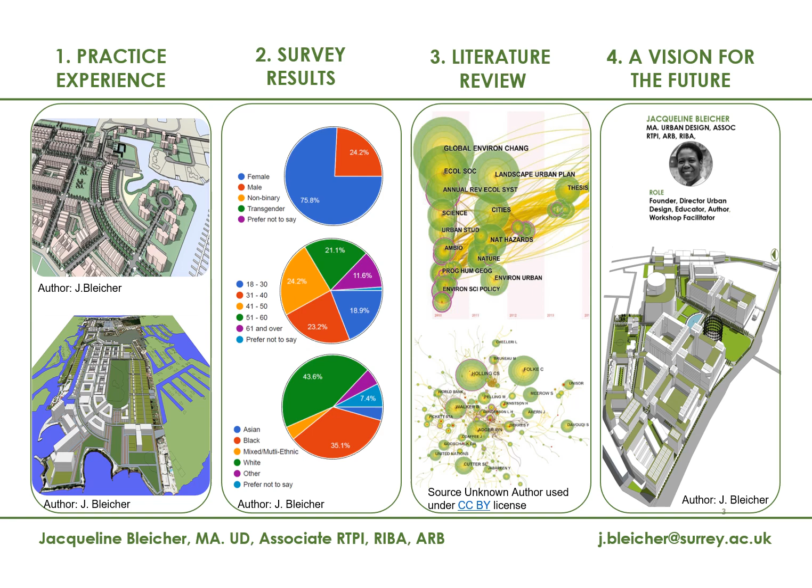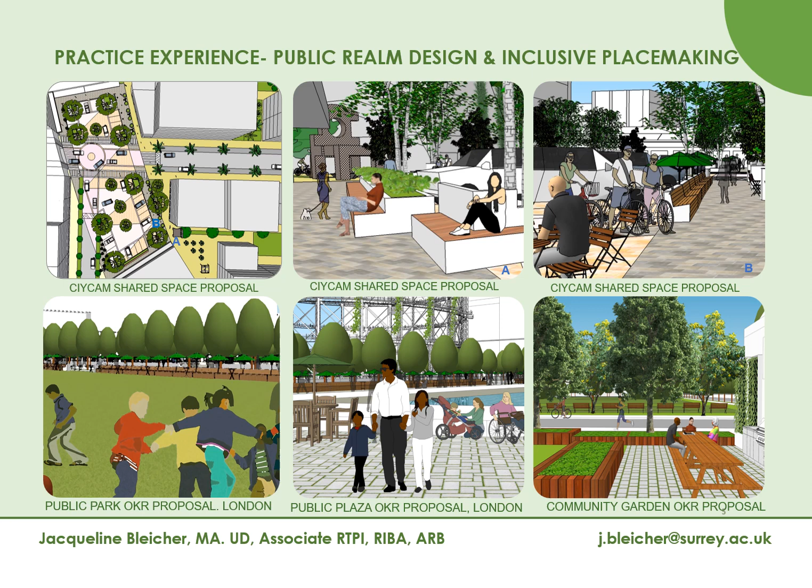My name is Jacqueline Bleicher. I'm an urban designer, UK registered and chartered architect, and postgraduate research student at the University of Surrey in England, the United Kingdom. I will be referencing former practice work from Global Urban Design, a community interest company, also known as GUD.

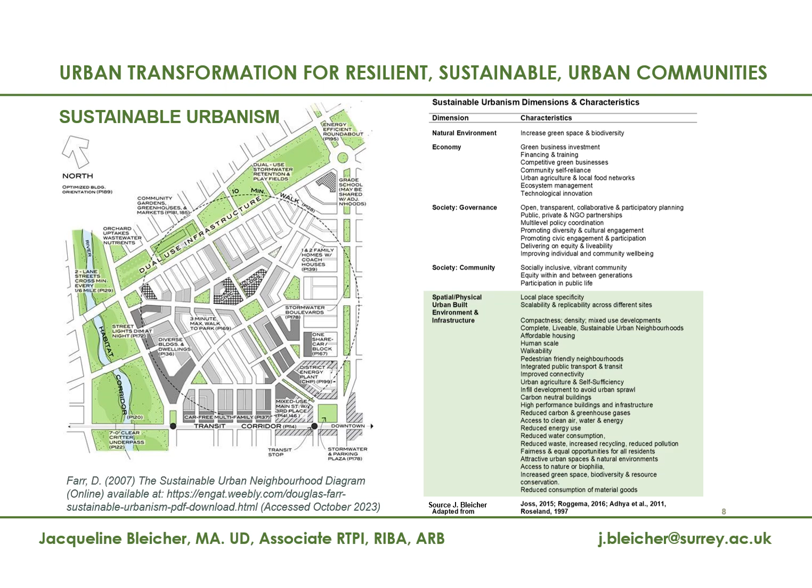I adapted urban design principles to design new urban forms informed by ideas and goals for the social, environmental, economic, and spatial dimensions of the site. In this height-restricted practice example, the building heights here range from 1 to 3 stories. The proposal is residential-led mixed-use development with 260 residential units and commercial, hotel, leisure, food and beverage, amenity, green space, and access to the waterfront.

The urban design principles utilized in this example are from Sustainable Urbanism, Responsive Environments by Bentley et al. 1985, and refinements on these ideas informed by professional practice. The refinements encompass diversity, which includes mixed use from sustainable urbanism, in addition to different building types, tenures, and people of various ethnicities, social and economic backgrounds.

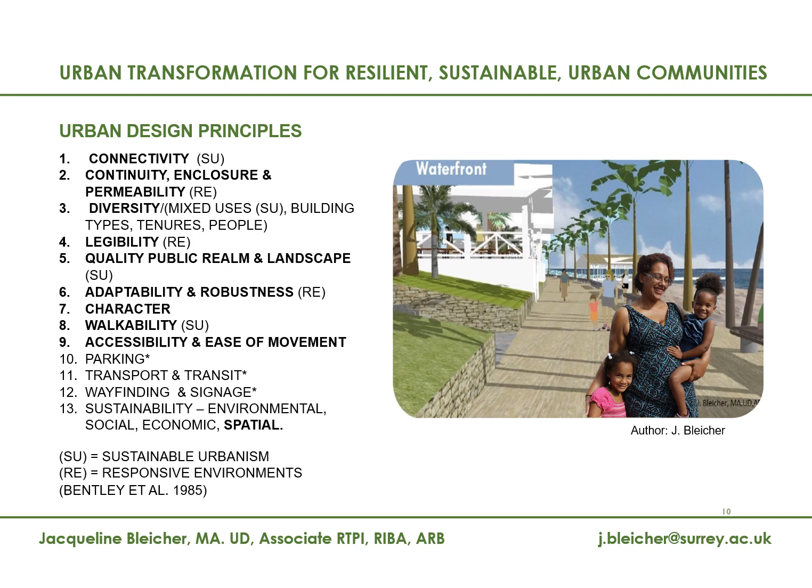Character refers to buildings' distinct appearance and neighborhood identity. This is a refinement of legibility from responsive environments, meaning that distinctiveness is informed by Kevin Lynch's paths, nodes, landmarks, edges, and districts. Accessibility and ease of movement is a refinement to facilitate aging in place and inclusion of people of various abilities, informed by sustainable urbanism's pedestrian-friendly neighborhoods.

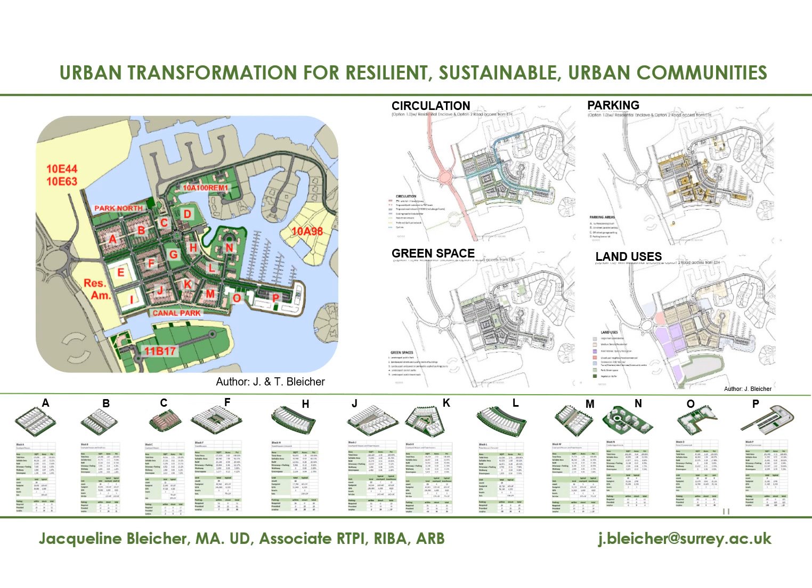This slide illustrates considerations for circulation and access, parking requirements, green space, and the mix of land uses. Also illustrated are the individual blocks and the building heights for each block. This image shows variety in building types. There is a community center, a recreation space and boat ramp, apartments, terraced or row houses, larger courtyard housing. There's also car parking within the block, so pedestrians can enjoy tree-lined streets with sidewalks shown in white and bike lanes in blue.

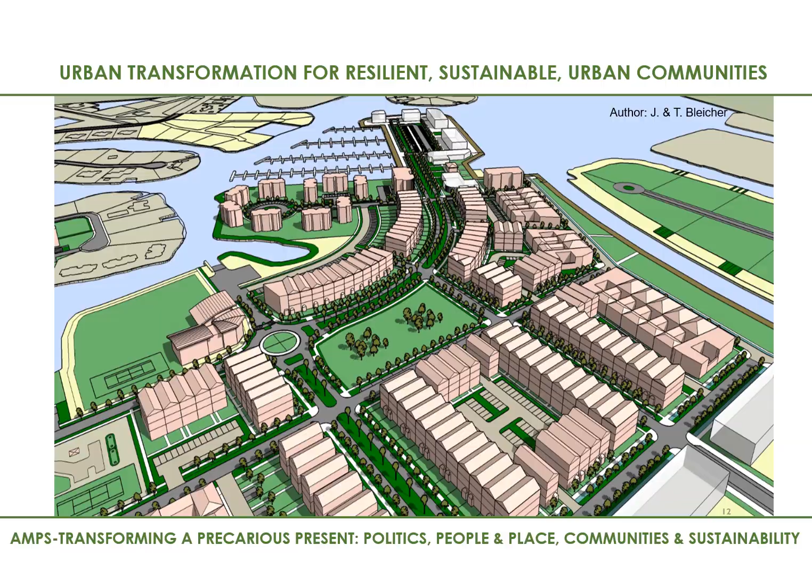Part 2. Sample Londoner Survey on COVID-19 Lockdown Spatial Needs for Homes and Neighborhoods. 2020 was an unprecedented year with the COVID-19 global pandemic and the ensuing lockdowns here in the United Kingdom. Like many, I was working from home, and the experience made me realize that accommodation and neighborhood amenities could support or hinder continued productivity, mental health, and physical well-being. I was curious about other people's lived experience of place through the lens of the COVID-19 lockdowns.

With collaborators, I circulated a post-corona community survey to understand what people observed and recommended to improve the places where they lived today and for the future. Sample survey questions include what community amenities or services were missing from your neighborhood during the lockdown COVID-19 pandemic, and in an ideal world, what do you think would improve your home and community?

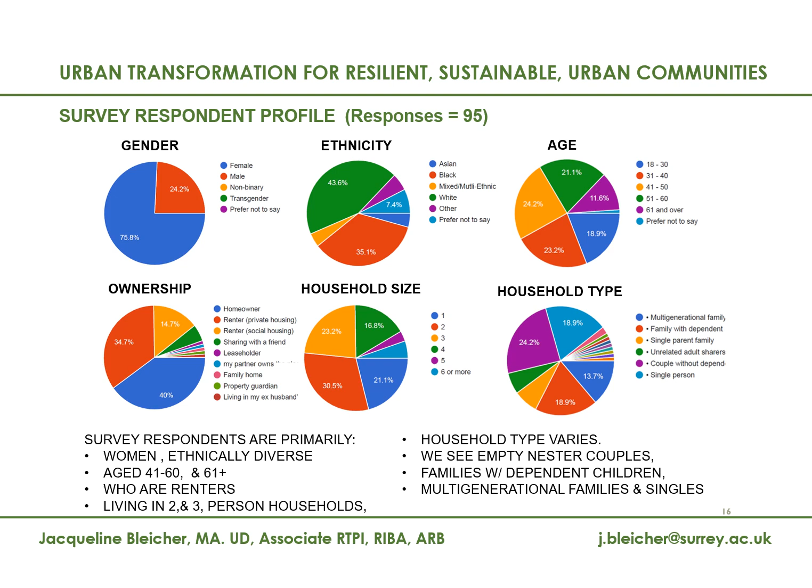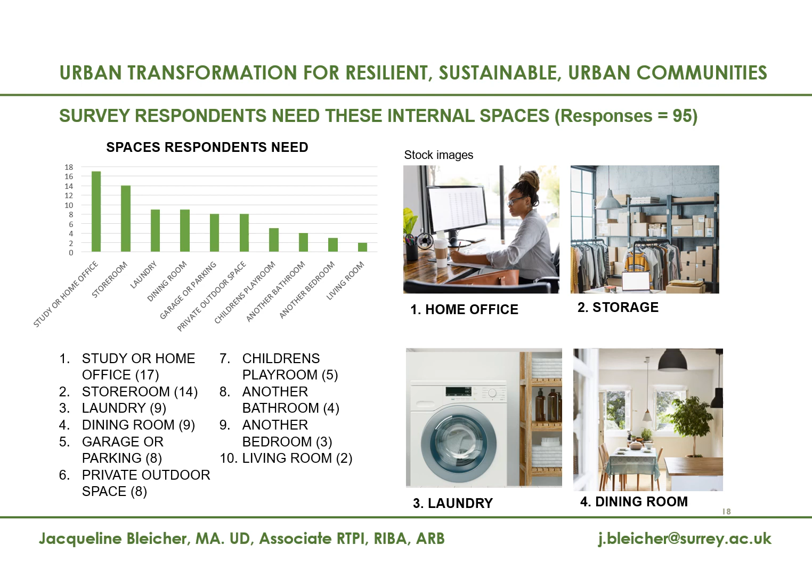Most survey respondents lived in London, England. Respondents were primarily women, ethnoculturally diverse, aged 41 years and older, who rented their accommodation and lived in 2 to 3 person households. Respondents resided in apartments or terraced housing with 2 or 3 bedrooms. Participants requested home offices so they could work from home. External space requests included parking and private outdoor space.

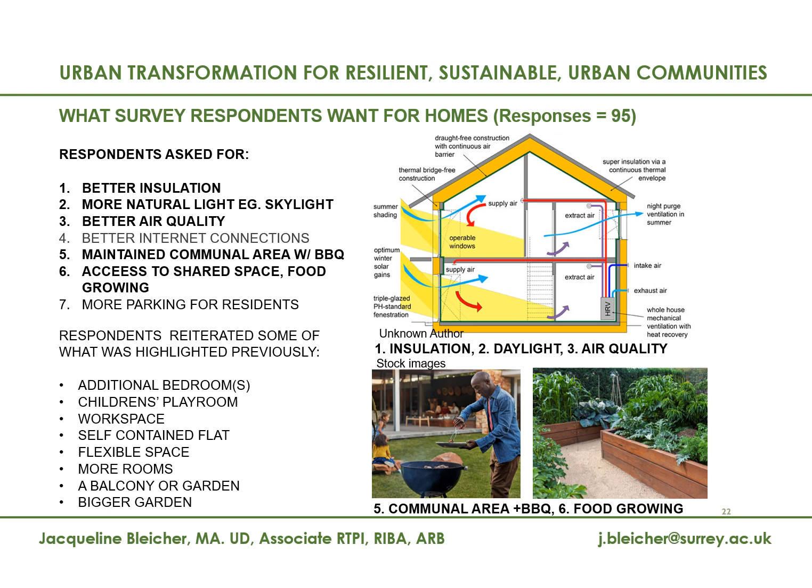Missing neighborhood amenities that were identified included sidewalks, bike lanes, and shops in walking distance of home. Respondents thought that neighborhoods could be improved by the addition of parks within walking distance and outdoor bicycle storage facilities. For the future, respondents wanted better quality housing with insulation, good air quality, natural daylight, and reliable internet connectivity. They also wanted communal areas with a barbecue and access to shared community gardens to grow food. For the future, respondents wanted better neighborhood amenities, including a community center, more active travel infrastructure, fewer cars, and subsidized public transport.

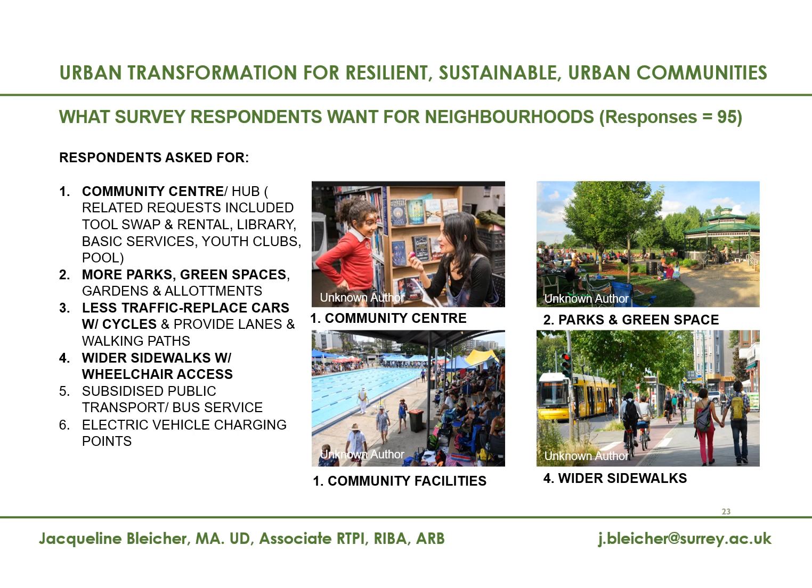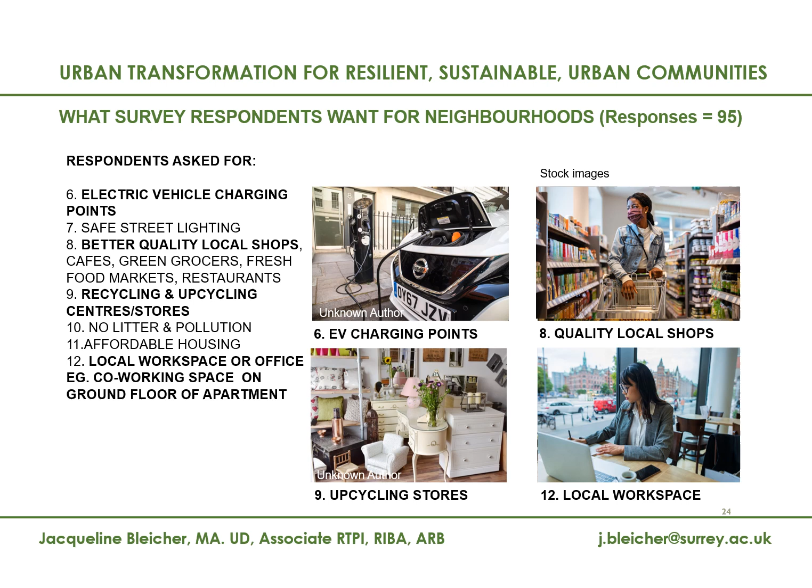Respondents also requested that future neighborhoods have electric vehicle charging points, higher quality local shops, affordable housing, and local workspaces or co-working spaces. Respondents raised social non-spatial issues such as caring about community members, hostile treatment in public space, and the need to access opportunities and financial resources.

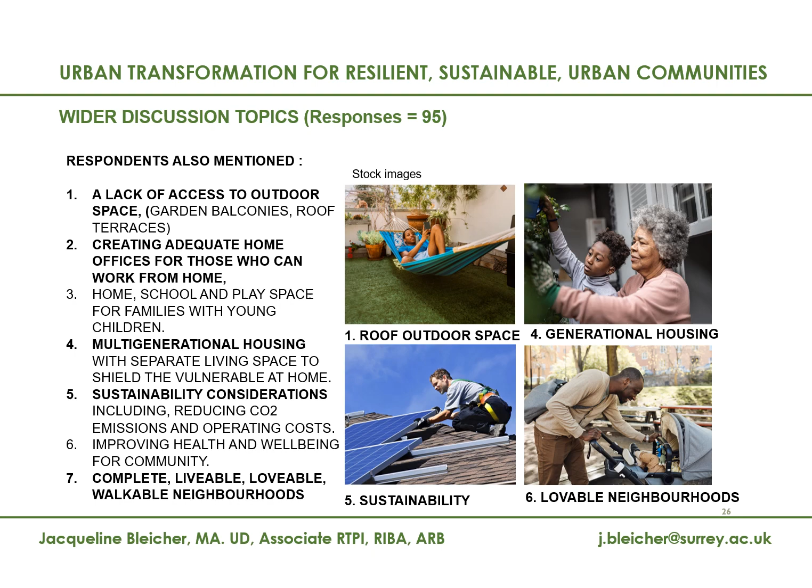Wider discussion topics included multi-generational housing, sustainability, household operating costs, improving community health and well-being, and residing in complete, livable, walkable neighborhoods.

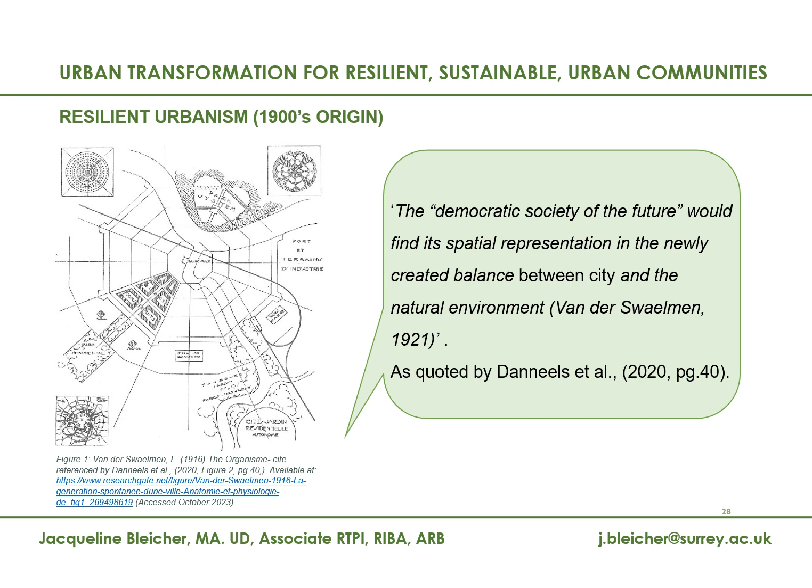Resilient urbanism is known as the urbanism of crisis. Five types of crisis are considered with respect to urban spatial considerations: natural crisis, ecological crisis, economic crisis, man-made or human-caused crisis, and health crisis. Accordingly, resilient urbanism encompasses climate change. The current climate crisis is reframing resilient urbanism to realize resilient, sustainable, existing and new urban settlements.

These urban design principles address prevention, adaptation, and new resilient urban built environments, specifically renewal and utilization, which refers to renovation, redevelopment, and reuse of existing assets; densification, which is increasing activity and density to reduce land take; and intensification, which is the efficient use of urban land.

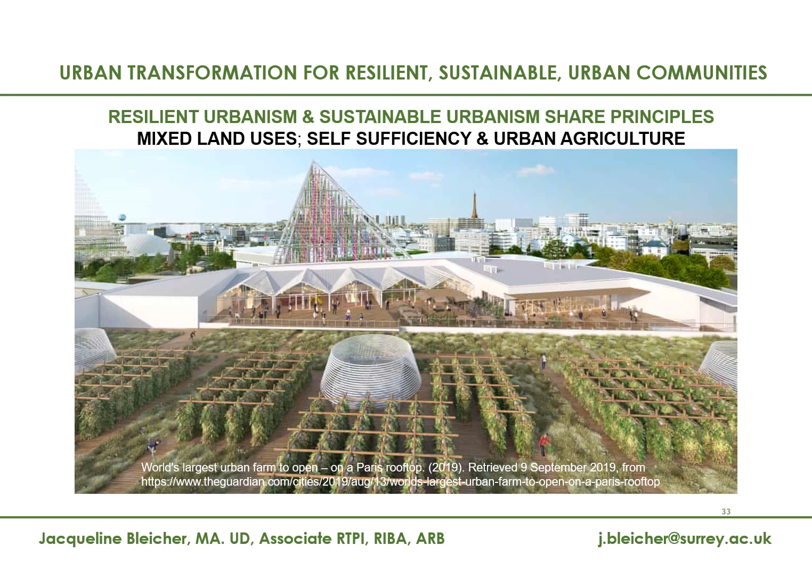Spatially, resilient urbanism promotes a mix of land uses that support local production and markets, providing economic stability from increased local food production and water security. An example of mixed uses and urban agriculture can be seen in this image of a rooftop farm in Paris. The ground floor of this building is a supermarket that sells the produce grown on the roof.

Part 4, A Vision for the Future, Old Kent Road Concept Proposal. This proposal was prepared for a design competition. The design decisions for the proposal were informed by the findings from the post-corona community survey discussed in Part 2. At the close of the survey, there were 95 responses, which were analyzed and grouped into recurring themes and sub-themes to develop the six future communities principles that inform this proposal.

The site is in Southwark, London, an ethnoculturally diverse community. According to Southwark Council, 46% of residents are people of colour, inclusive of 25% Black residents and 11% Asian residents. The site is home to various faith groups and creative groups, which are active in the area.

The site is also home to the Veolia Southwark Reuse and Recycling Plant, a primary school, residences, big box retail stores, parking, and light industrial used for workshops, recording studios, worship, makerspace, and storage.

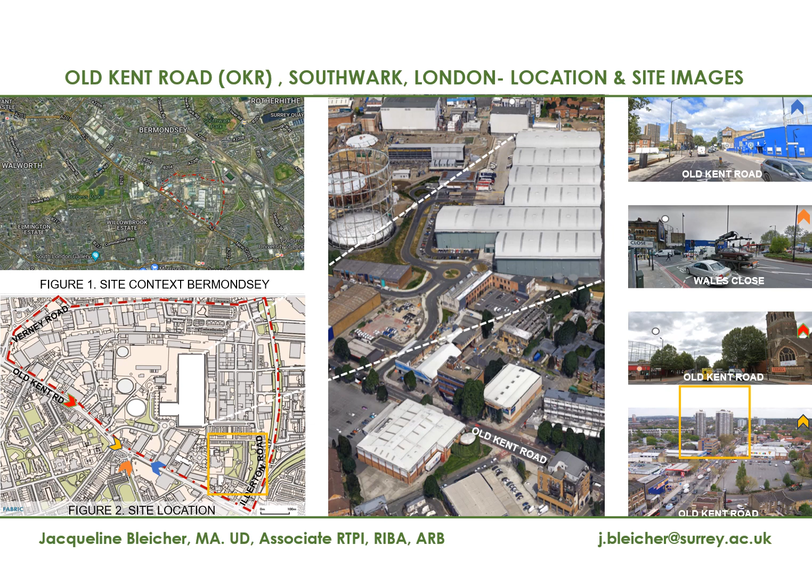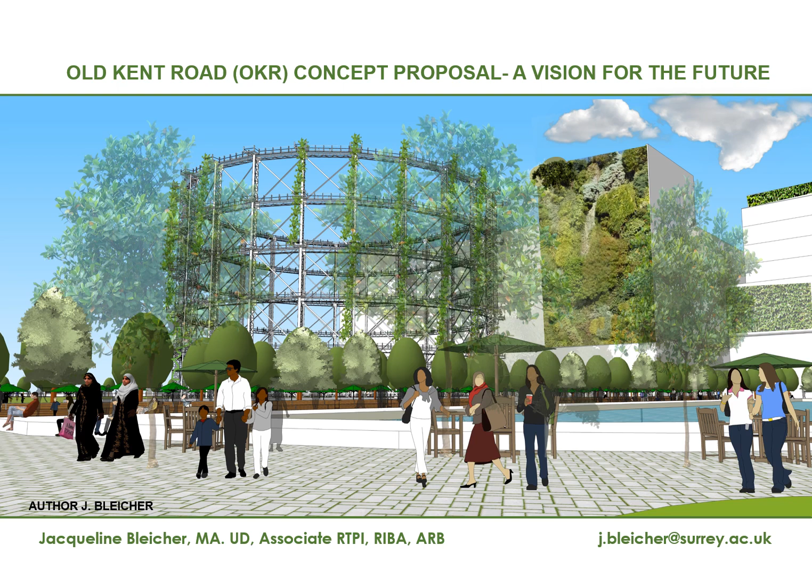The brief, informed by survey responses, is to create a walkable, resilient, sustainable, affordable, quality community that includes green space, shops selling healthy food, access to public transport, electric vehicle charging infrastructure, and housing with adequate internal space and outdoor space like balconies, terraces, or gardens, with basic amenities necessary for daily life and aging in place.

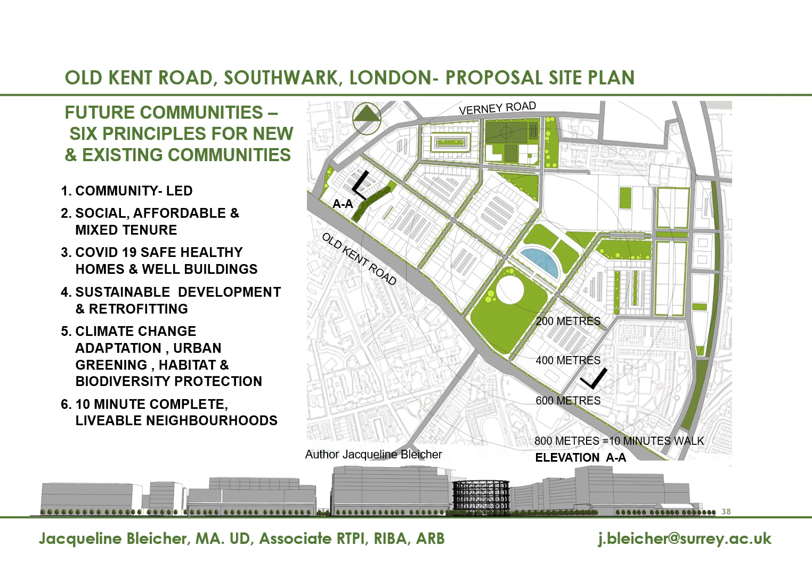The 6 principles developed are community-led; social, affordable, and mixed tenure; COVID-19 safe, healthy homes and well buildings; sustainable development and retrofitting; climate change adaptation, urban greening, habitat and biodiversity protection; and 10-minute complete livable neighborhoods where people can age in place. The proposal revisits the typical linear high street idea to create a place with a heart, multiple destinations, rest and pause areas, quality housing, leisure and recreation, all within a 10-minute walk.

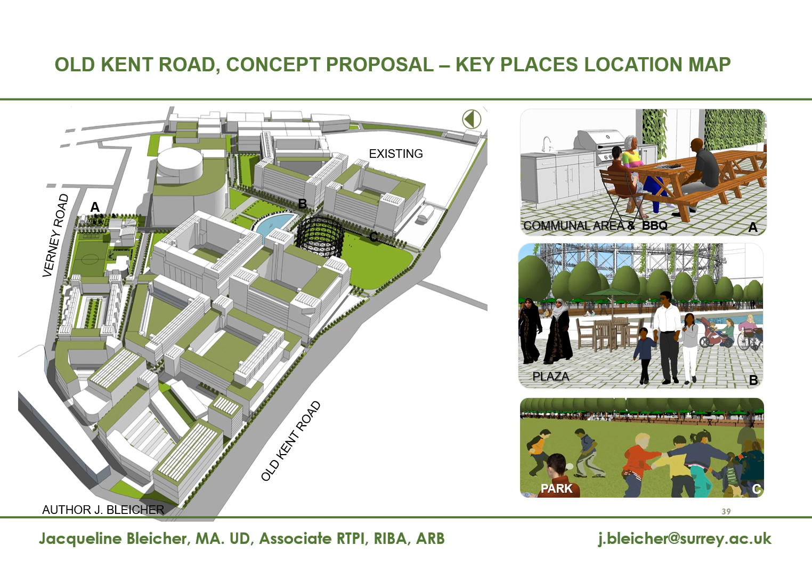Key areas include the communal area, community garden, and barbecue space, a request from the surveys. There's also the public plaza, and there is the Central Park. The proposal retains most of the existing land uses, protecting livelihoods, in addition to adding approximately 6,000 new residences, creating patronage. The site uses are mixed vertically in the buildings, so ground floor uses are shown. Upper floors are devoted to residential, recreation, urban agriculture, and space for solar panels and rainwater harvesting.

The site is also mixed use horizontally, as can be seen in the site plan. The site is compact and walkable with access to a major green space within 5 minutes walk from the outer edge of the proposal to the center. Buildings range in height from 2 to 10 stories instead of the 25-story towers favored by the council. Commercial ground floor space is spread over 2 stories with generous ceiling heights per council specifications, with residential above.

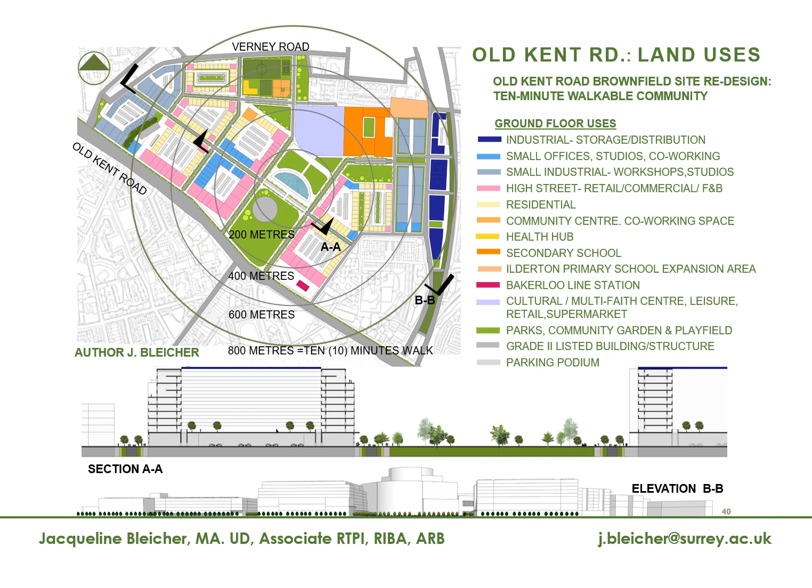Principles 1 to 3 are illustrated here. COVID-19 safe homes in well buildings: dual aspect dwellings allow for cross ventilation, daylight, and more generous space standards. Community-led: community space with community-run and managed assets, space for growing food, a community center, co-working spaces. Social, affordable, and mixed tenure: social housing is interspersed throughout the proposal and integrated into each building, so there are no poor doors or segregated play spaces.

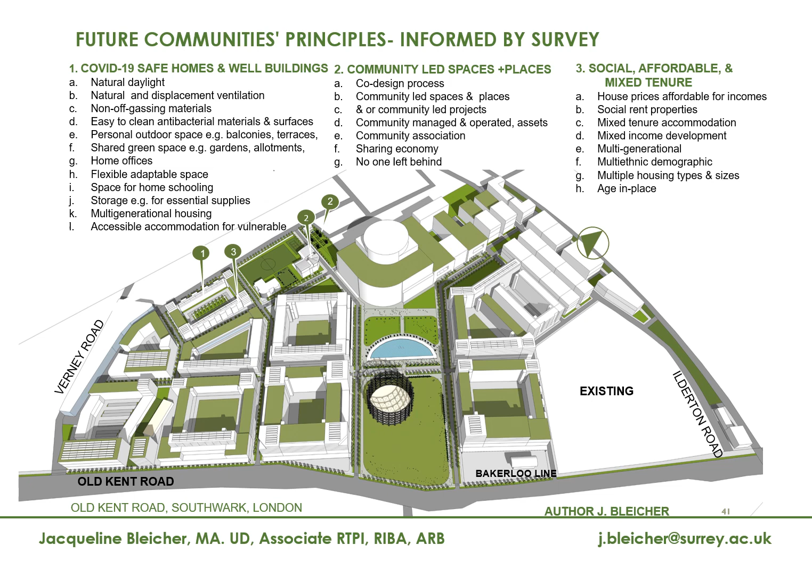The plaza is overlooked by housing, shops, cafes, restaurants, the multi-faith center, a supermarket, and is close to a school. These varied land uses give different people various reasons to use a public space at different times of day, fostering regular social interactions that build tolerance and trust. So users of the public space are less inclined to be hostile to or afraid of people who may not look like them, who are also using the public space. This was a concern from the survey. However, wider social issues of ethnicity profiling also need to be systematically addressed.

This slide addresses principles 4 to 6. Sustainable development and retrofitting: net carbon buildings and retrofitted buildings have a low operational cost over the life cycle of the building, which was a survey consideration. Displacement ventilation systems are used instead of recirculated air systems to safeguard against airborne diseases and viruses. Climate change sensitivity and urban greening, habitat and biodiversity protection: this principle is evidenced in green roofs, green walls, rooftop gardens, community garden shop, green space, interior block podium parks,

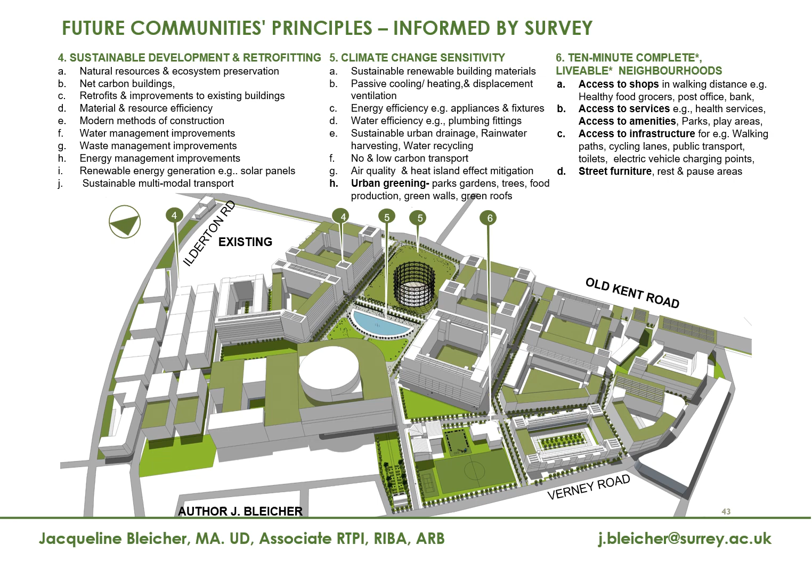and the solar panels. 10-minute complete livable neighborhoods provide access to shops and services. There's also the health center and community center, and amenities like the children's play space, a sports pitch, bike lane, street furniture, rest and pause areas. This slide of the community garden shop and communal space with barbecue illustrates some of the previously discussed principles and features. The community garden is across the street from the sports pitch and the children's play area. So you can see some of the urban greening strategies in place. Also note the bicycle lanes and the sidewalks that are visible in this image.